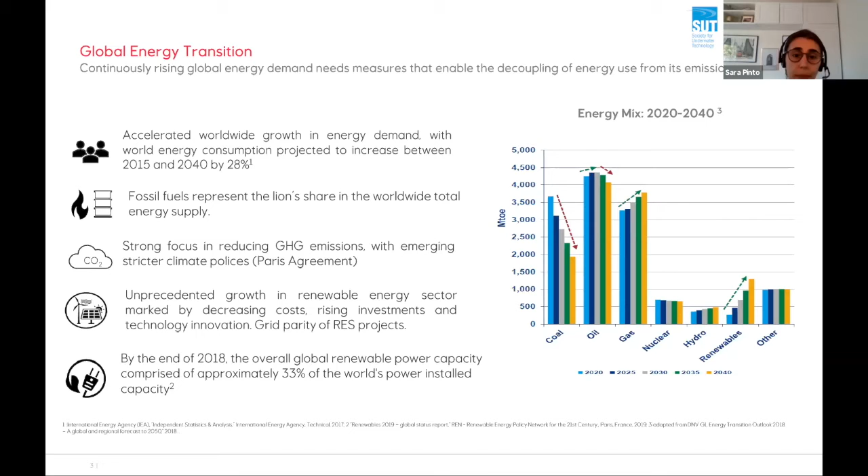of course, as you can see from the graph, fossil fuels still represent a lion's share in the worldwide energy supply, but we really see this trend of renewables coming in, and they have a great role to play in the upcoming years. So if we can go to the next slide.

Yeah, so before jumping into floating solar, I think it makes sense just to give you a quick overview of solar PV itself, because if we understand that market and why it is such an attractive renewable energy source, then we understand the jump and the need for floating energy. So the solar PV sector is quite a well established sector. It has consistent growth so far, and we have seen tremendous cost reductions in the recent developments. So it's possible to find applications of solar PV technology in various types.

For instance, on your rooftops, you can have just the PV modules installed, but you can also now have tiles that have the PV cells incorporated in them. That's called, for instance, building integrated PV. You also have the more common type of solar parks, where you have your PV modules installed on top of ground-mounted structures. And of course, since we all have a background in subsea technology, it's possible to find solar PV panels in buoys and signaling buoys in the ocean.

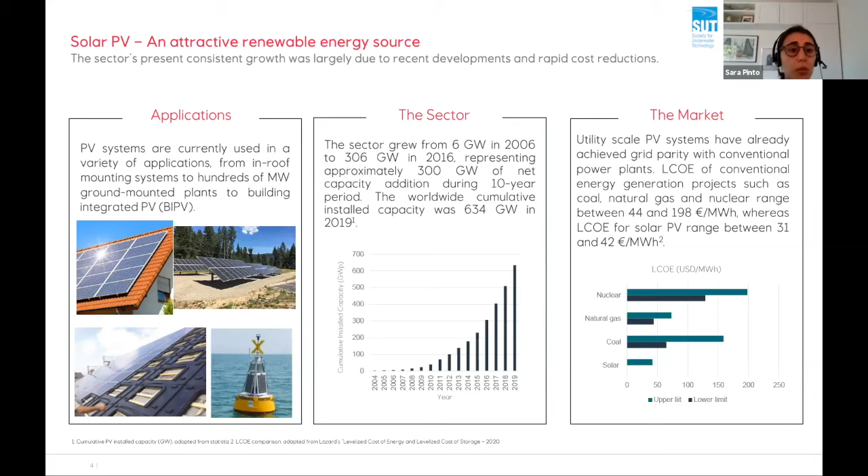then we start to understand, like everything in life, the ground-mounted PV technology has challenges, and those challenges were the main drivers for the emergence of floating PV, especially in certain markets. Of course, solar technologies are key for the energy transition, but these challenges will limit project development.

And of course, the most important challenge nowadays seen for the ground-mounted type of technology is that, you know, the easy sites have already been used. So now we are moving to harder sites, more difficult topography, and of course that has an impact on the cost of the project.

If we are in locations, let's say Asia, where there is a lot of competition for land, shall we use the land for installing solar PV? Shall we use land for agriculture? That's just one example. That, of course, increases the cost of land, and also increases the capex of the project. And of course, once again, the good sites have been used. So nowadays we are moving from areas close to the consumer.

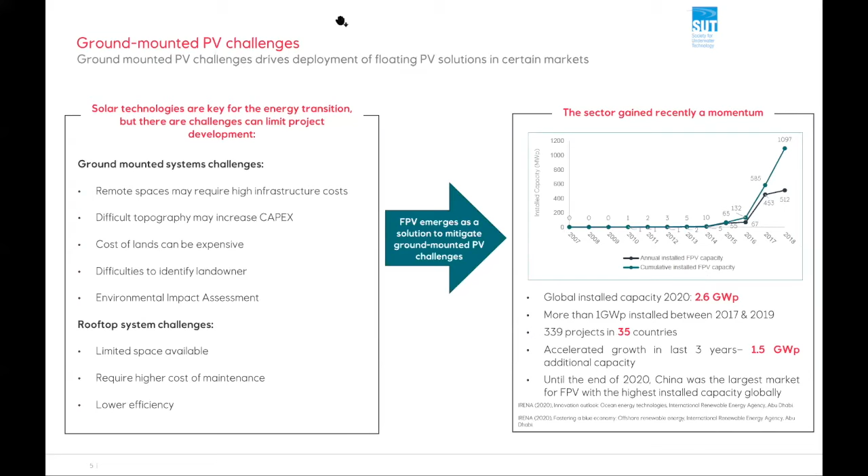I honestly believe so, but of course we may have challenges with efficiencies with regards to the technology, but I definitely believe that it will have a role both on the ground mounted technology, so to speak, but for floating solar, I think it could be a very interesting application.

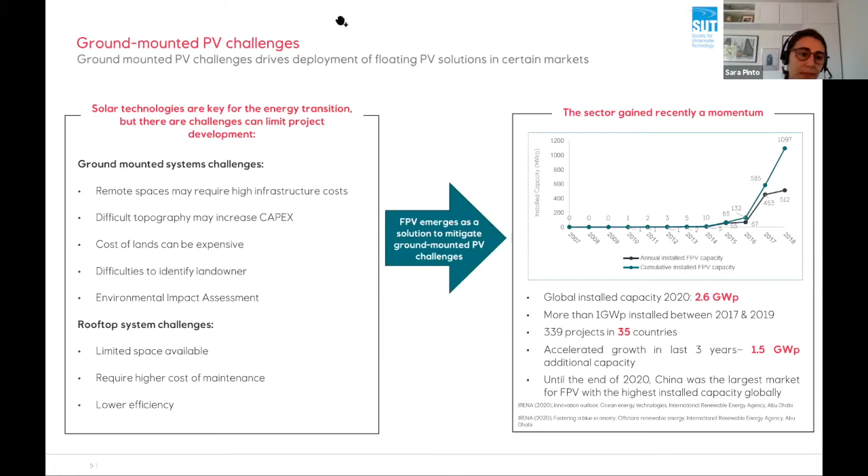No worries. So I guess we can go to the next one. Yeah, so this slide is basically just to give you an overview of where in the world it's possible to see more floating solar projects installed. And just for you to picture a bit the pipeline and how it is envisaged that we will see a steady growth of the sector in the upcoming years. So if we can move to the next slide, that'll be great.

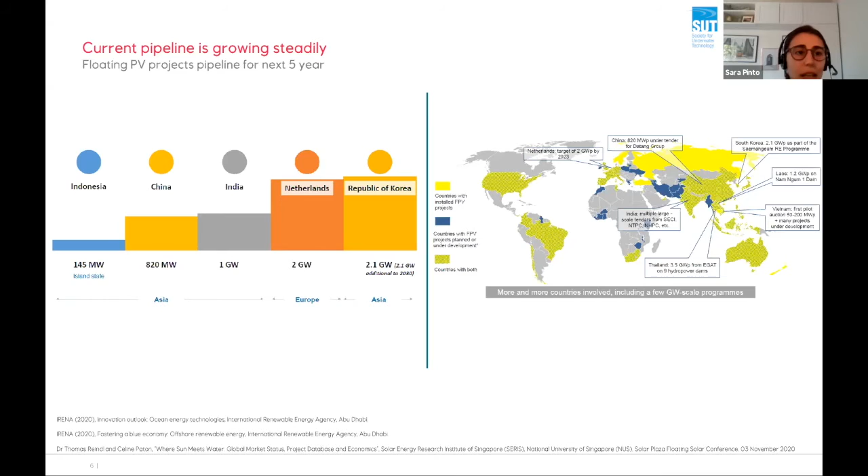This starts, I guess, being a bit more interesting because I'm starting to deep dive on the technology. So floating solar, it is somehow and not at the same time a very complex technology. It basically consists of a floating structure where you put on top your PV modules, and of course you need to have mooring lines and anchors to secure this floating structure to the seabed, and of course we need to have the underwater cables to bring the electricity to shore.

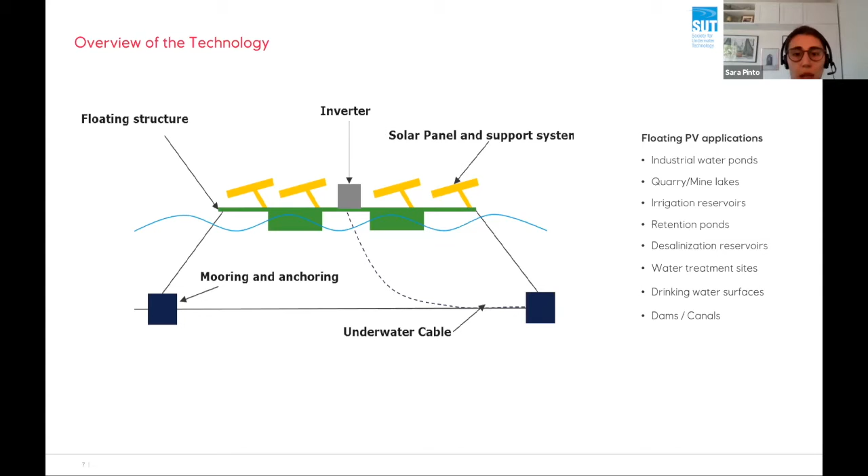The floating PV applications, as you are going to see in the next slides, I like to split them in several segments, but the market has emerged with applications in what we call the freshwater type of bodies. So that's, for instance, drinking water reservoirs, reservoirs from hydroelectric dams, industrial water ponds, and so on and so forth. And the type of technology that we see there is totally different from the technology that is currently being developed for, for instance, marine applications. But we will see this as I go through the presentation. If you can go to the next one, Sutri, that'll be excellent.

Yeah, I'm not going to bother you a lot with the benefits of floating solar, because I think that by explaining to you the biggest challenges for the ground mounted, they were the drivers for floating solar. So of course we don't need to use land, we are using water bodies, so the competition for land and all the costs involved with that is somehow erased.

And of course at the same time, from an environmental perspective, it is expected, because this is still under research, that these floating structures will have a positive effect, and they will contribute to the reduction of algae growth and improvement of the water quality where we place them. And it is also expected that by having a floating structure on top of a lake, that will reduce the evaporation of that water body.

But of course, on the energy production, it has been highlighted in the literature so far that one of the biggest benefits is this increase in production, like I have explained previously, due to the cooling effect of having the PV modules next to the water.

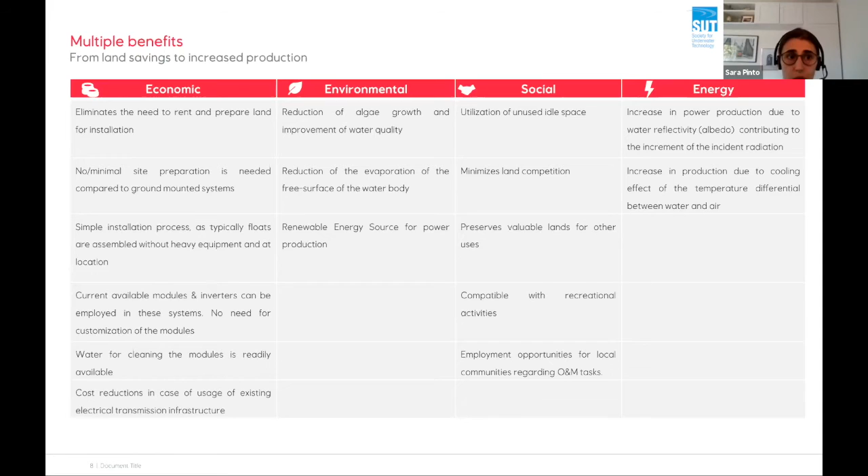Previously, or in the early stage of floating solar, there were some claims that this increase in production could be up to 10%. But recent studies are pinpointing different numbers for this increase in production, and they are showing also that the increase in production is extremely dependent on the type of technology that is used. And I will pinpoint that to you in the upcoming slides. So if you can go to the next one.

This is a very hot topic nowadays with regards to floating solar. I don't want to spend a lot of time deep diving into it, but there is a strong focus on either co-locating or hybridization of hydroelectric plants. So there are several projects in the world. For instance, in Portugal, they are going to build a floating solar PV system in a water reservoir from a dam, and the idea is twofold. Either you can use the floating solar plant as another source of energy, and then you inject that energy into your grid, and that's basically co-location.

You have two different sources, but then you can try to go into a model of hybridization. So you will be somehow using the daytime peak load to support the evening peak. So you will be somehow optimizing the day and night power generation, and somehow you could use the reservoir as a giant battery. This is also done in some countries, for instance, with onshore wind, and by using floating PV in some countries installed on top of these reservoirs from hydroelectric plants.

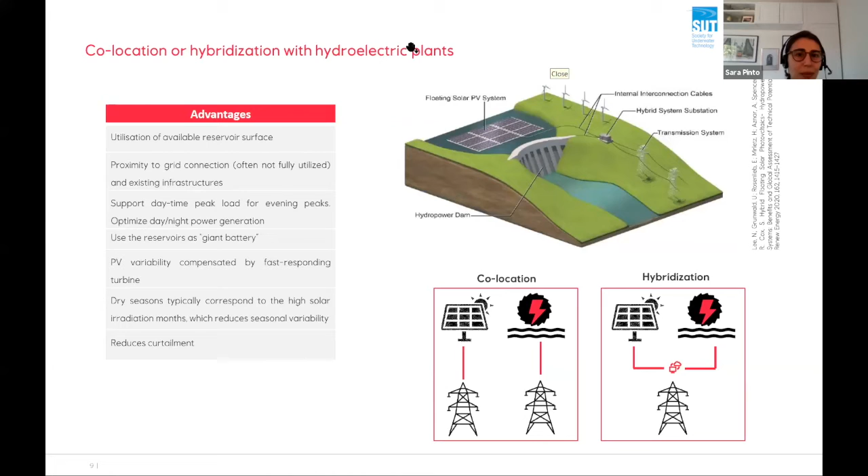Hello. Hi. Just saw a question pop up, so I thought we'd ask that. It's from Chengi, asking: the applications you outlined seem to be inshore, and would it be correct to assume that floating PV systems are not suitable for offshore locations? Oh, we are going to see that in the next slide. So if you can bear with me for a second, you will see that. Yeah, I'll move on to the next.

Yeah, so this one here is a very busy slide, and it will touch somehow on the question that was just asked. There are challenges connected to the technology, and so far I've been trying to present to you more the freshwater type of applications, and unfortunately the sector has already seen some incidents. For instance, in Japan, there was quite a serious one, but these are all learnings for the sector, and we see now project development being done in a much more robust way. So there are several challenges with regards to floating solar. For instance, warranty of the PV modules. If we have applications in salt water, these can lead to premium costs.

And of course, like I've been trying to pinpoint to you, a lot of the environmental impacts of these floating solar structures are still poorly documented. So there's a lot of research ongoing, and from a technical perspective, there are very interesting challenges with regards to lifetime and reliability of the structures. The structures themselves will be moving under the constant movements of the waves, and how that would lead to fatigue of the structures. We'll be talking about corrosion of the floating structures, but also potential corrosion or accelerated degradation of the PV modules. And then we'll have marine growth as well. So there are a lot of challenges that are being addressed in the sector.

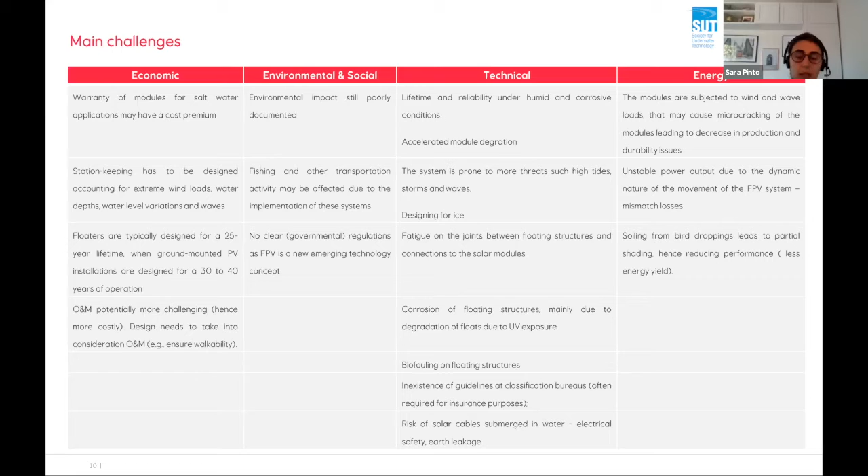So we are looking at still a young sector with great potential, but with still some challenges that need to be sorted. And one interesting aspect I can pinpoint is that recently, in the beginning of this year, the first recommended practice from DNV GL was published. So that signals that the floating solar sector is getting more serious attention from different stakeholders around the world. So if we can go to the next slide.

Yes, I think I've mentioned this to you before, how I see the floating PV market. I see it in these four categories. And a bit answering the previous question, yes, we see current applications in freshwater bodies, in small lakes, now in bigger lakes, where we start to see a higher impact of the waves, but we are also seeing technology development for the marine environment.

I like to call it marine environment, neither near shore nor offshore, because I think the way the market is going to evolve is going to be quite a natural step. Of course, it makes sense that the technology is first going to be deployed closer to the coastline, for instance, in harbor ports. And we see research ongoing nowadays, and we see pilot testing. But at the same time, we can expect that the technology will be developed to be applicable in harsher conditions in the ocean. And there are already technologies in the demonstration stage being developed for that end.

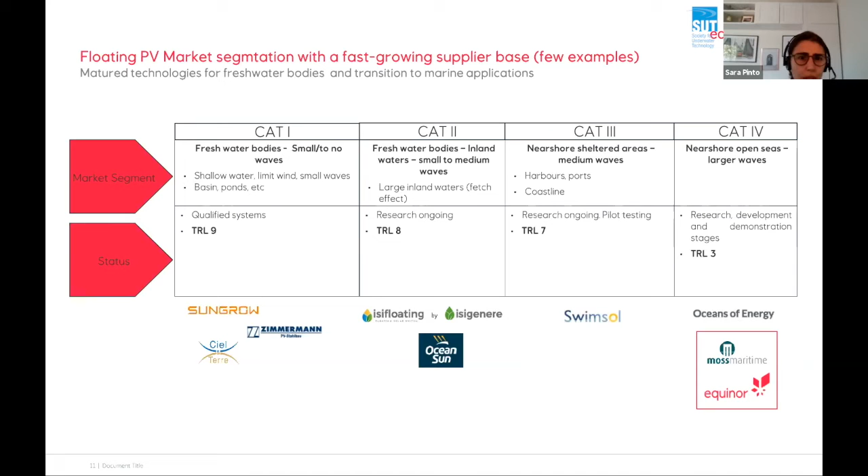So the next two slides I will actually show to you. If we can go to the next one. Yeah, so I can just show you some examples of the technologies. There's a bit of a lack of technology convergence with regards to floating structures, as you can see from these slides. Each type of structure has its benefits and drawbacks. I'm not going to go into details. I just would like to pinpoint that the most commonly used floating technology so far in freshwater applications is the individual float type, the one on the left-hand side of the screen.

Yes, that one, the HDPE type of structure, but we also have other types of structures, like the one on the opposite side, the membrane type of technology. And the reason I'm pinpointing these two technologies is also because of what I mentioned earlier on the cooling effect. If you look at this membrane technology, the membrane is in direct contact with water, and then we have the PV panels on top. And here, the cooling effect and the increase in production is much more

pronounced than in the HDPE type of technology, because we have a somewhat closed structure, the plastic pontoon, where we put the PV module on top. So we have some increase in production, but it's not as high as in this type of membrane technology. So if we move to the next slide,

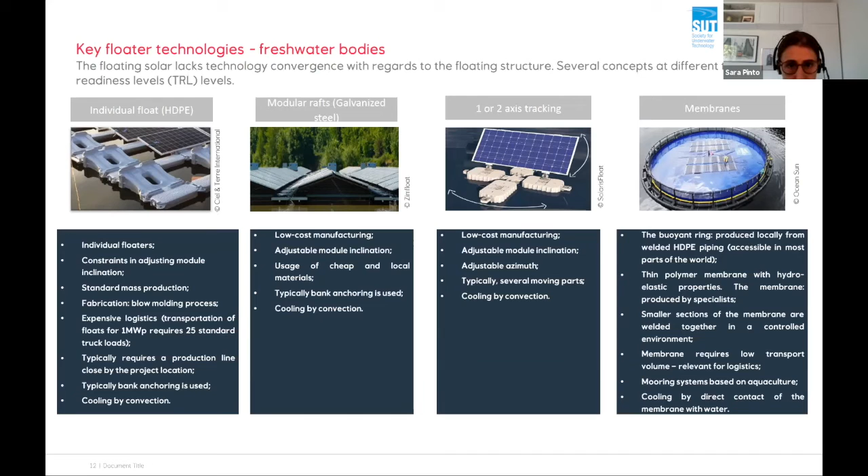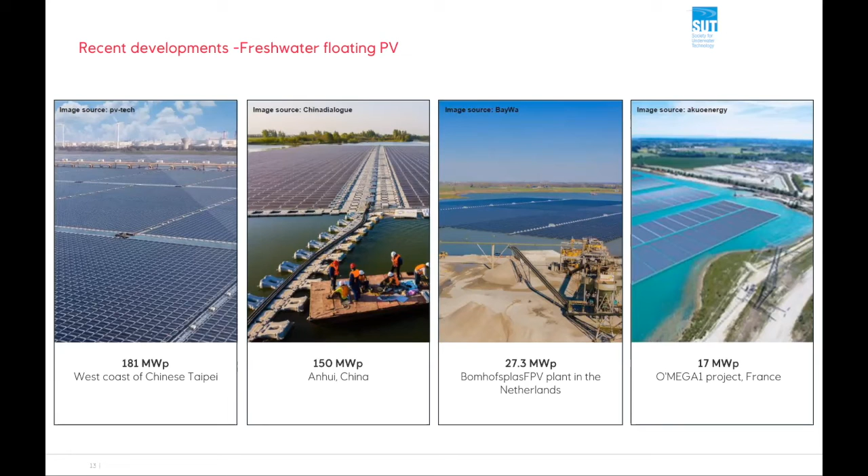Okay, just quickly, we've got another question there, again from Andrew Smith: how much work is being done around anchoring floating solar in oceans or large lakes? Are micropiling solutions, better for the environment, being considered? I think the anchoring is very much dependent on the project and where you are. You can see a lot of different solutions being deployed, from more conventional types of anchors to concrete blocks to piles. It really depends on the project. I hope I answered your question.

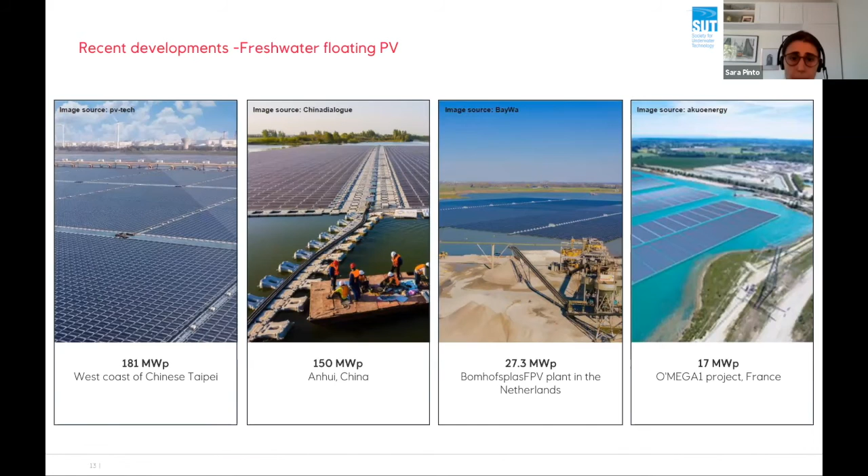Great. So this slide is just to show you, so you can visualize a bit, the biggest floating PV projects so far installed or recently installed. And if we can go to the next slide. Yes, it's going back a bit to the marine applications of floating solar. There's a lot of focus on research simply because the common types of floating structures used in freshwater are not suitable for marine locations, because these structures will be facing heavy loads that will compromise their reliability, and these systems were not developed for

that. So we see a strong focus among the research community on developing new concepts instead of scaling up the existing technologies, and of course it's imperative to find a balance between a system that is able to withstand the cyclic loads of the environment and at the same time survive the extreme conditions that we see in the ocean, and that is paramount for a multi-megawatt project.

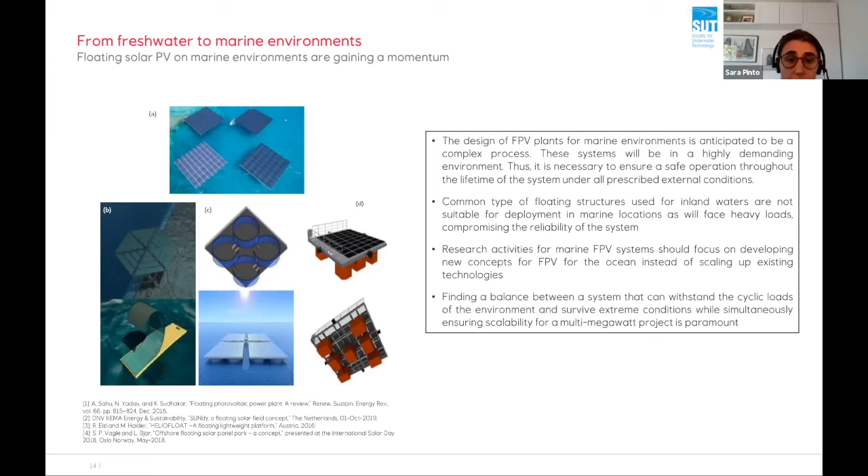So if we can go probably to the next slide, but I see that probably there are some questions popping up, right? Yes, you've got one that seems more like a comment. So you've got Bruce there saying Ocean Flow International have provided mooring calculations for an ocean-based floating PV array. And then a question below that from James: so what are the dimensions of the largest systems installed to date?

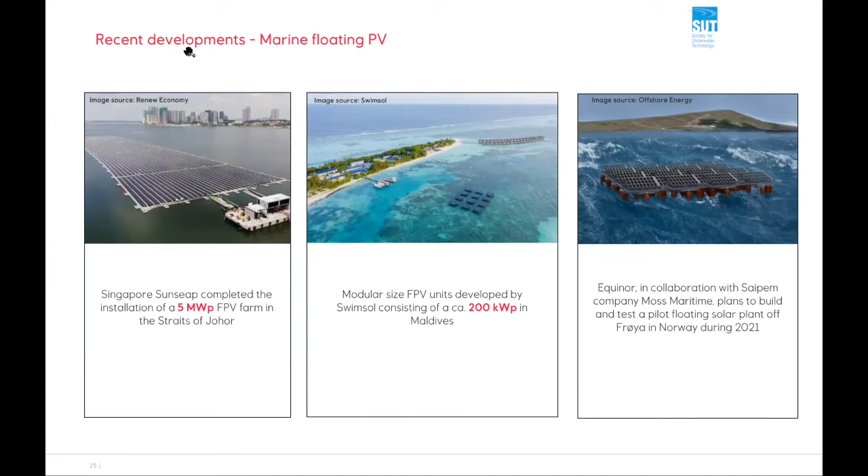To date, okay. So for freshwater applications, so far it's 150 megawatt peak capacity installed in China. And with applications in the marine environment, we have in Singapore a 5 megawatt farm installed very recently. But we have more research and development ongoing, and there is a consortium or collaboration between Equinor and Moss Maritime, which is a company that belongs to Saipem, and they are aiming to test one of the first floating solar plants that are going to be deployed in harsh environments here in Norway. So it's going to be very exciting to see that.

So I think there are more questions popping up. Yeah, just a further comment from James there saying, apologies, I meant physical dimensions rather than the power output. Oh, physical dimensions. Okay, that's a fair question, and I don't have a good answer for that.

But I guess I can point out to you that the footprint of solar is quite big, and the same goes for floating solar. So if you can imagine that a PV module has dimensions of nearly 2 by 1 meters, and if you aim for a PV module that has a 400 watt peak capacity, you can easily calculate how many PV modules you need for 150 megawatt capacity. And then you have roughly a dimension of how big, and it is huge, the footprint of this technology can be. I know it was not a very straight answer, but at least it gives you some homework to check that.

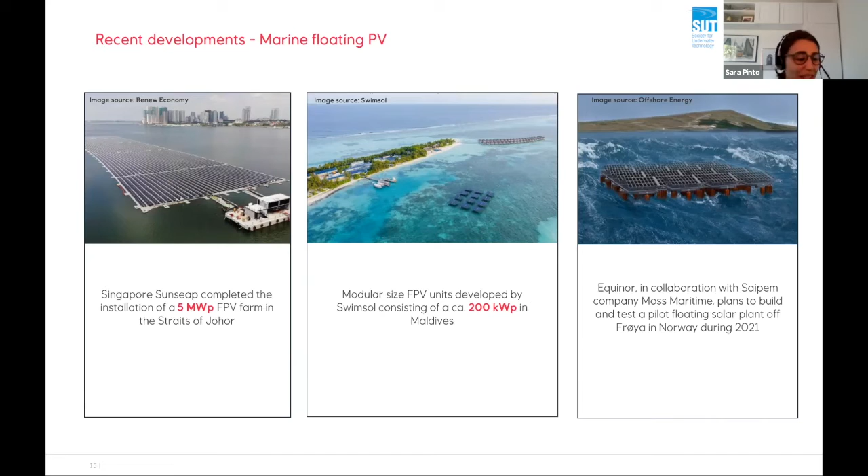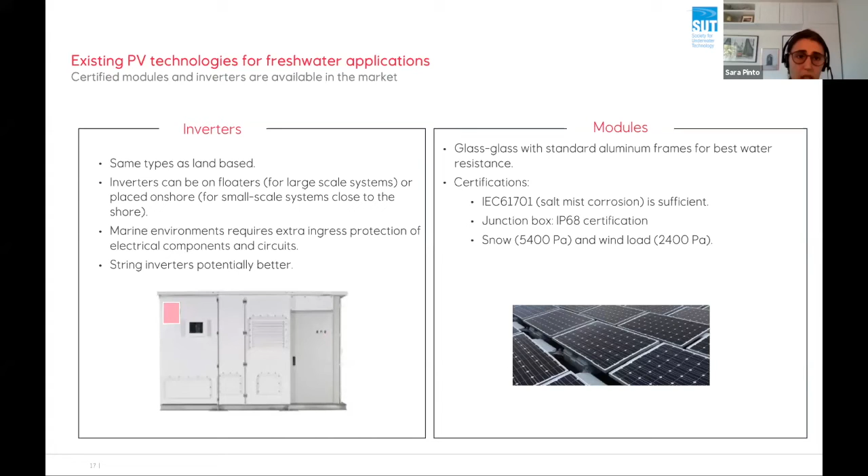I think I will somehow just skip this one, but basically to point out to you guys that some of the existing technology for ground-mounted solar applications, and by that I'm talking about the modules themselves and the inverters commonly used on land, can be easily used for floating applications on freshwater bodies. We just may need slight improvements, for instance, on IP ingress protection, but that is already off-the-shelf technology. So if we can go to the next slide.

So there is at the moment in the sector a lack of suitable tools that allow us to thoroughly estimate the energy production of floating solar systems. And the main aspect is really connected with how we can incorporate the potential benefit of the cooling effect of being close to the water. So what we aimed to do with this publication was to select 3 case studies and run this simulation tool, aiming to incorporate the cooling effects, and then also compare those results with what we call a reference system inland.

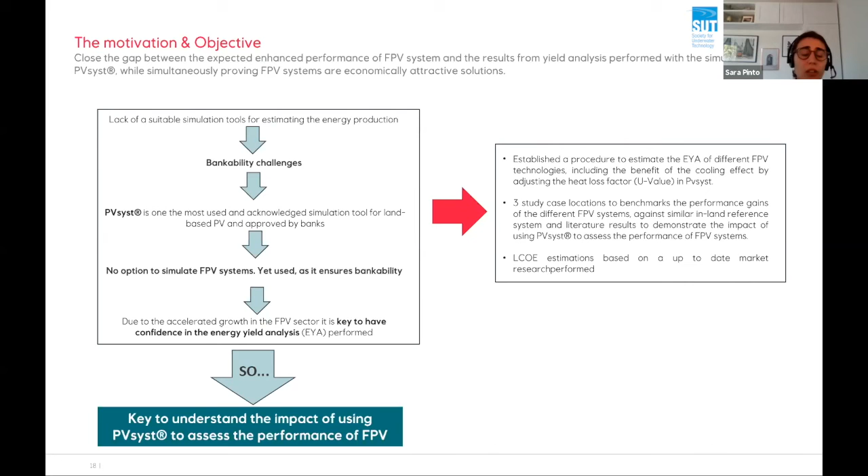So the first one is, is there any concern about adverse effects of this technology on marine life? That's a very good question, and like I said, a bit on the environmental side, there's a lot of studies going on. So we still need to wait on that.

Okay, and then next one. So in designing fresh methods, I think that's meant to say, have you given any thoughts to include ease of decommissioning in an offshore environment? Can you repeat that question? Sorry, Jamie. Yes, so it says in designing fresh methods, I think there's maybe a bit of a typo there. Have you given any thoughts to include ease of decommissioning in offshore environments?

I think that decommissioning is very important, and I'm pretty sure it's been taken upon on these research projects and these pilots that have been done. So decommissioning is paramount. We need to understand what we are going to do with the floats, with the PV modules, once the floating solar farm reaches its end of life.

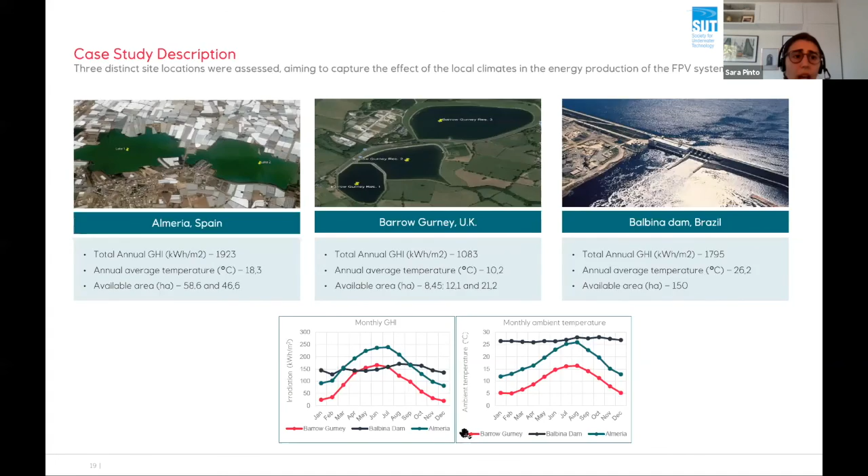a bit on the technology and on how to incorporate this cooling effect. How we did that is we tried to adapt the so-called U value in PVsyst, and our work was based on the research done in Singapore in a test bed where several different types of technologies were tested and grouped according to the increase in production seen, and hence this U value. Technologies with a more minimized footprint on the water have better convective cooling. They are called freestanding, and they have a higher U value.

But technologies like, for instance, the HDPE type we've seen in one of the previous slides have a larger footprint on the water. So the water surface is partially blocked, we have less impact of, for instance, the wind in creating this cooling effect, and hence these structures have a lower U value. So we studied these two types of technologies, a freestanding one and a large footprint one, to try to capture the largest differences in the U value.

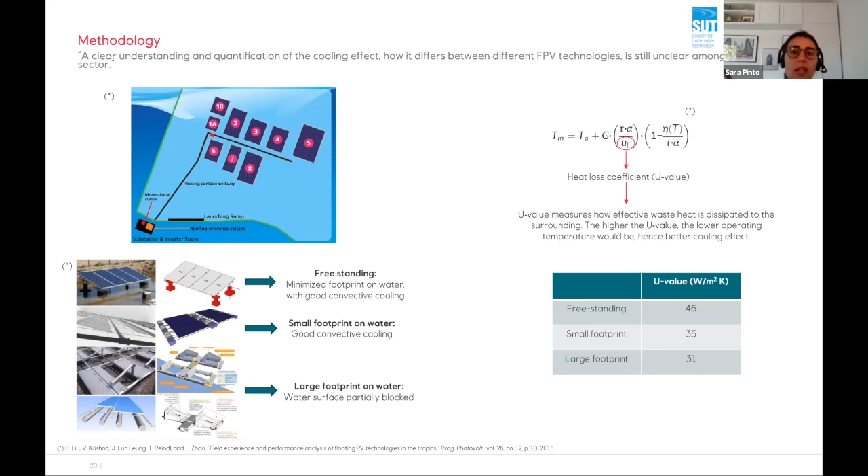If we move to the next slide, it's just to pinpoint the technology selection, which I think is the most important thing to show you, on the floating technology itself. We chose to use the Ciel & Terre type of technology. That's one supplier that has several different technologies that provide a certain inclination. And then we chose the other type of technology from Solaris Synergy, which provides two types of inclination for the PV modules. And of course, there are limitations on the application of these technologies with regards to wind and wave heights.

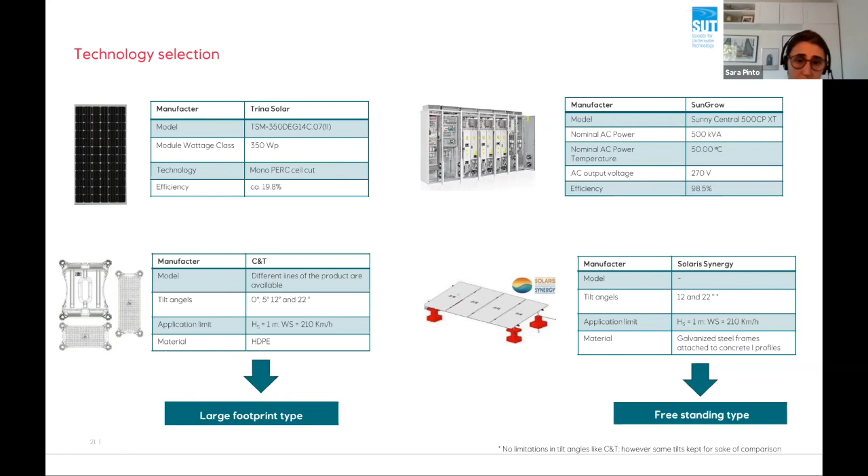So it of course depends on the technology, but for instance, for Solaris Synergy, we have something around a 2.5% increase in production in comparison to the reference system, whereas it has been anticipated in the literature in the past an increase in production of 10%.

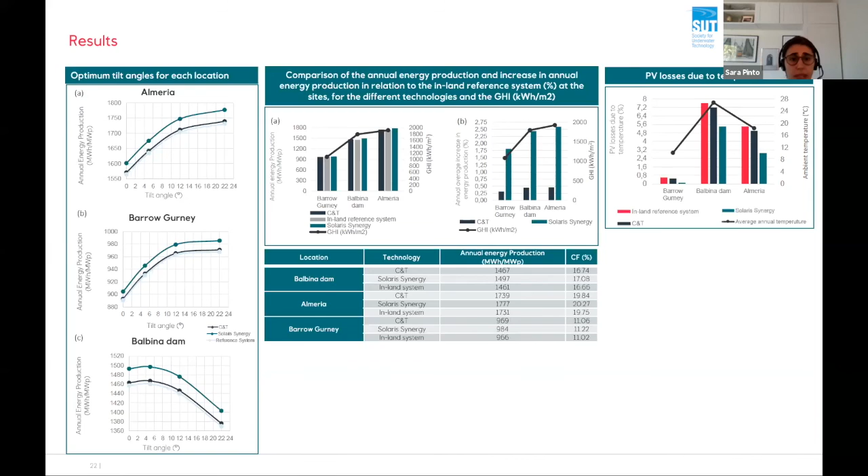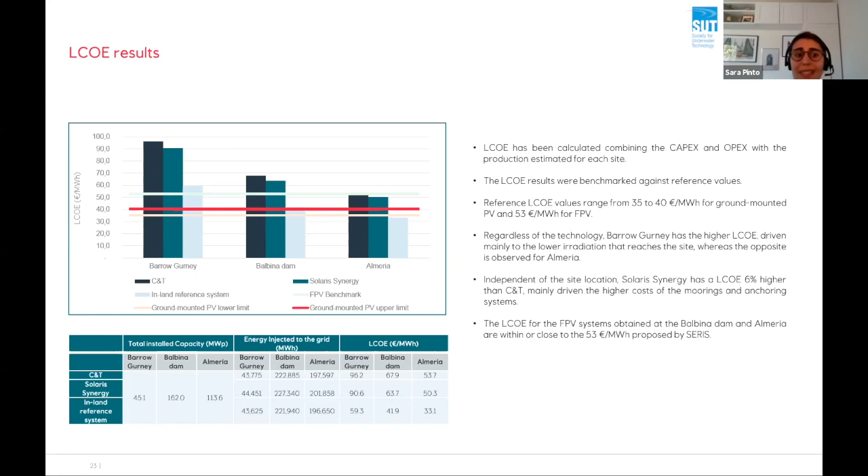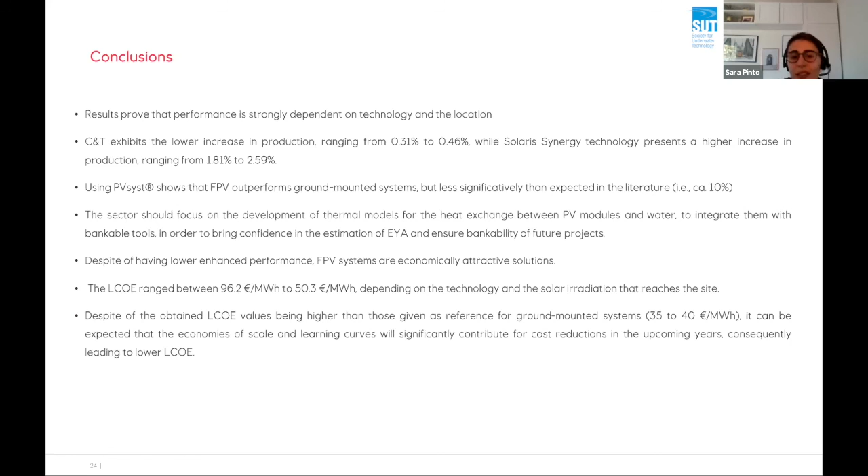And I think that, very quickly, I showed that these floating PV systems are economically attractive solutions. So the last slide is what is next. I think it has been pinpointed, and you have also asked questions, about the marine applications of floating solar.

So my colleague and I have also written another paper that explores a bit more the marine applications of floating PV, the potential opportunities of co-locating marine floating PV with offshore wind, and also more details on the technology landscape, the challenges with regards to the design, the key technical aspects, and so on and so forth.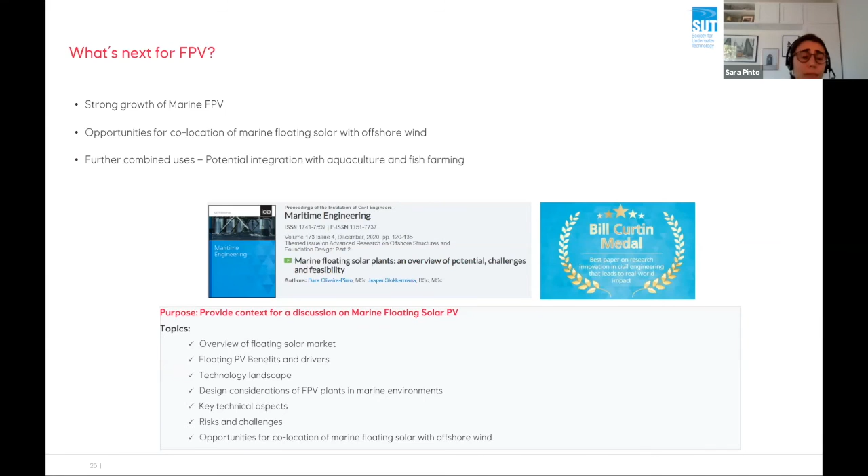So I think we are a bit over time, and that was it for today. I hope this has given you some insight into what the floating solar market is, what it consists of, and where we see it going in the future.